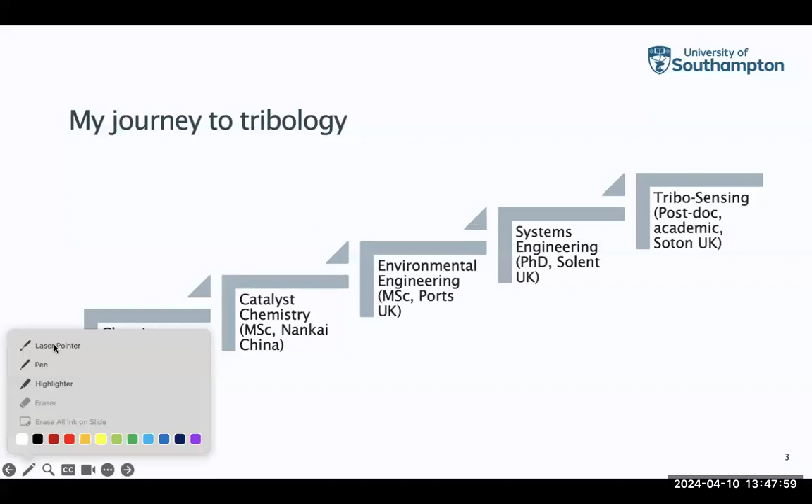I am at Southampton at nCATS. I'm currently a professor in Tribo-Sensing. Don't worry about the title for now, I'll explain it in a minute. I've been working there for more than 20 years. I joined Southampton in 2001, so it's been over 20 years I've been doing tribology.

But if you look back at what I did in my degree, master's, and PhD, it was nothing related to tribology. In a million years I never thought I'd be a tribologist, to be honest. But that doesn't mean I'm not enjoying what I'm doing - I really, really enjoy it.

To give some background, I did a bachelor degree in chemistry in China at one of the top universities, Nankai University. Following that, I did a master's degree, also 3 years, in catalyst chemistry.

After finishing my master's degree, I worked at an Environmental Bureau research institute, where I came across research in environmental engineering. I thought I'd like to do more study in environmental engineering, which is why I came to the UK in 1996 to study it for 1 year.

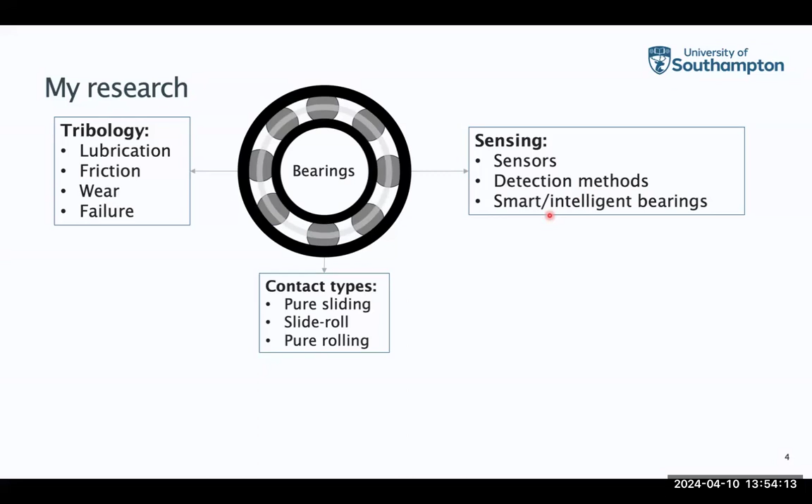That's an overview of my research areas. I've done other things as well, but these are the main things I've been doing over the last 20 years. Most of my projects are actually funded by or related to industry.

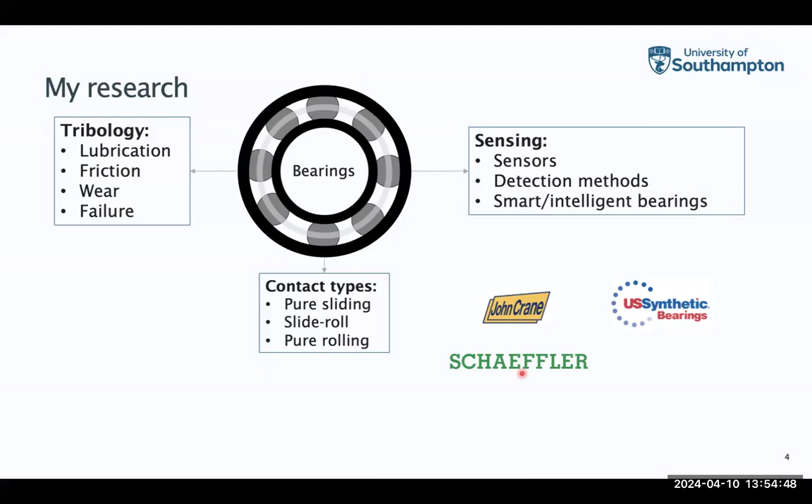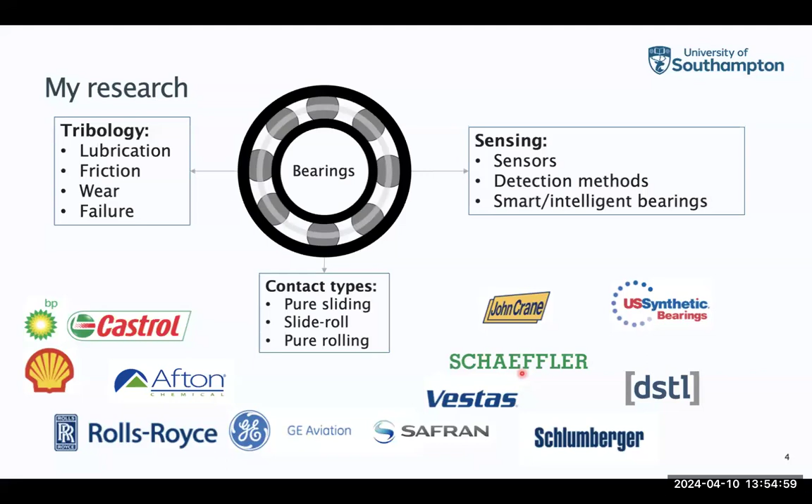For example, bearing manufacturer John Crane funded one PhD project looking at tilting pad bearings modeling for texturing surfaces, and also different materials for the US synthetic bearing company. Many of my projects are sponsored by Schaeffler in Germany, one of the largest bearing manufacturers in the world. My work has also been sponsored by lubricant manufacturers, additive manufacturers, OEMs, and sensor manufacturers.

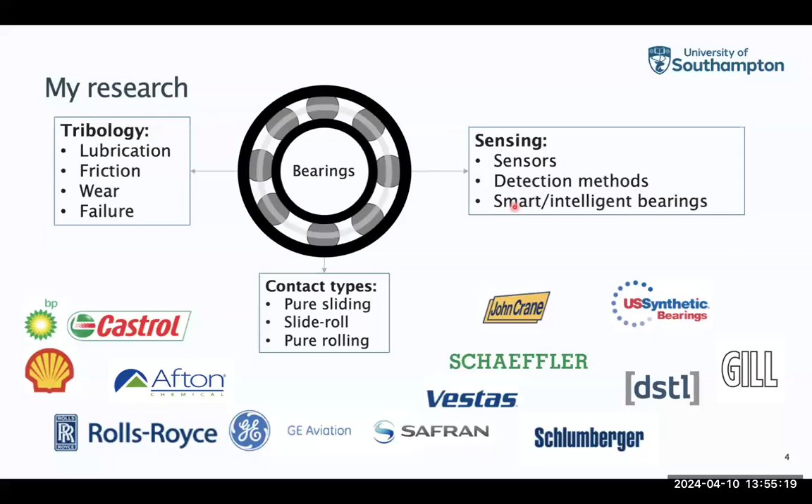So all the research is closely related to industry problems. Although I have done so many things for today, I wanted to share with you one of my main research areas related to microstructural alterations in bearing steels and rolling contact fatigue.

These topics have been studied at Southampton in my group for over 10 years now. We started from looking at just white-edging cracks, and then gradually moved out to all different types of microstructural alterations. As I said at the beginning, my career path, I didn't have any mechanical engineering background. So looking at those microstructure alterations was also a very big challenge for me, because I didn't have a materials microstructure background. Over the last 10 years we have developed loads of unique results, and I'm very proud of my students, my postdocs, and working with all the colleagues as well.

So I just wanted to share with you an overview of what we did in this area. Nothing like groundbreaking conclusions or anything, just to share what we did to tackle this particular problem in bearings.

So I just wanted to go back to start looking at rolling element bearings, obviously related to rolling contact fatigue. It is the phenomenon that's occurring in rolling sliding contact. This happens in wheel on roads or even on rail, and also in all the rotating machines where you have bearings, rolling element bearings, and also gears. So they are caused by cyclic loading on materials.

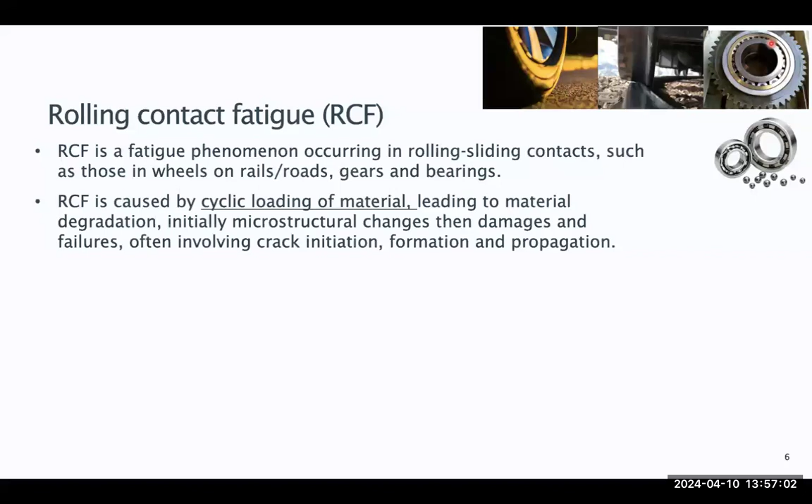This cyclic loading often leads to material degradation, which is the ultimate failure mode for rolling element bearings. This deterioration of material in rolling element bearings always starts with some sort of structural change, or we call it alterations. Then gradually it leads to damages and failures of bearings, often involving crack initiation, formation, and propagation as well.

Rolling contact fatigue can cause failures in rolling element bearings, but it is the ultimate failure mode for rolling element bearings. If the bearings are operated properly and lubricated properly, they can last a very long time. So the expected bearing life is over 20 years.

For example, for megawatts of wind turbine, the main shaft bearing normally rotates at around 20 RPM, and it is expected to serve more than 175,000 hours or 200 million cycles under continuous operation, or over 100 million cycles if they operate 12 hours a day. So this is what we expect, but as most people have heard, some megawatt wind turbine gearbox bearings fail at a very early stage of their operation, rather than serving for a very long time as expected.

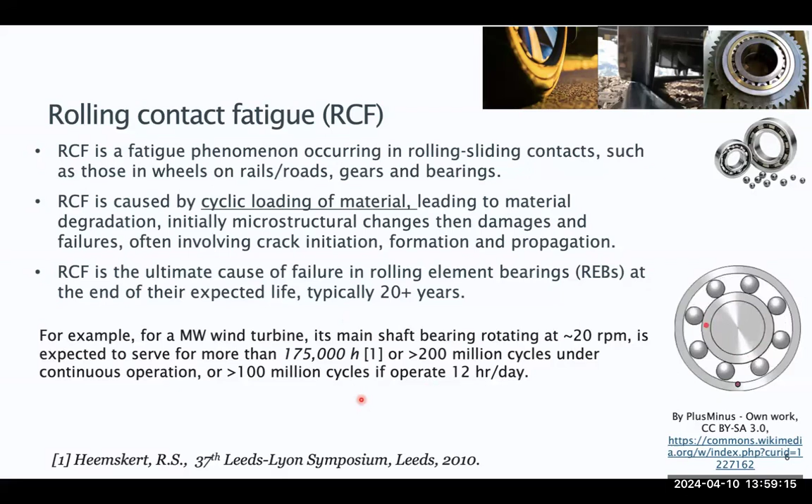So the bearing rolling contact fatigue life can be calculated based on the ISO standard 281, where they take into consideration the dynamic load rating, and also the operating load and the type of bearings. If you know your bearing design and you know the dynamic load rating, which you can normally get from the bearing catalog, you can calculate, under the particular operating load that bearing is used in a machine, their expected life.

So L10 is the number of cycles or hours at which 90% of the same bearings would survive without a failure. If you wanted to work out L50, that means that 50% of the same bearings will survive without a failure, which is much longer than the L10.

The dynamic load rating is calculated, tested based on the bearing having a stationary outer ring, and the inner ring can endure a load until failure at the rated life of 1 million cycles. So if the bearing can survive for over 1 million cycles under this load... until this load it cannot survive, then that will be the rating life of this bearing. That's the C for each type of bearing.

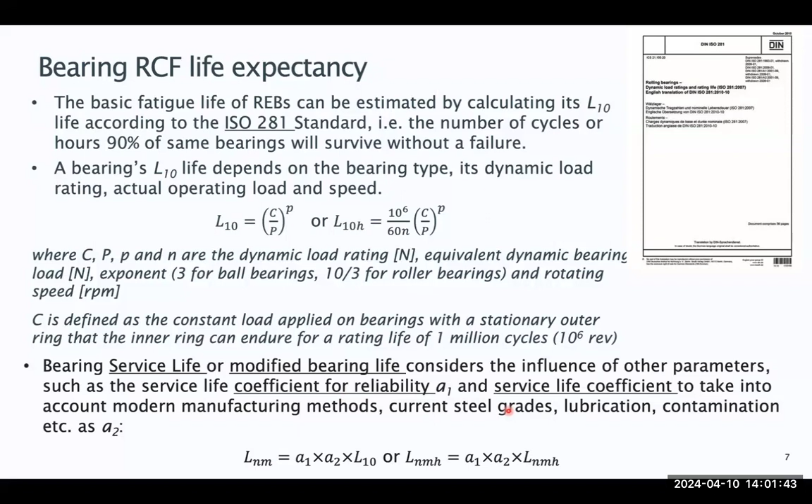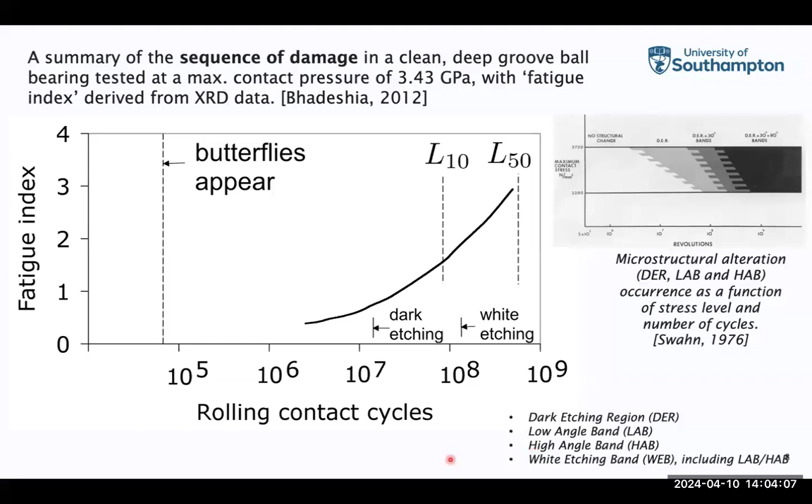DER is used to represent the dark etching region. LAB is low angle bands, and HAB is high angle bands. But normally we call it white etching bands to cover both the low angle and high angle bands. I'll show you some pictures in a minute so you know what I mean by different features. So this is what's done in the literature.

Just to recap, a butterfly normally looks like this. You have a center here, which is normally a non-metallic inclusion or void or some sort of stress raiser, and you can see two wings grow from the inclusion, so we call it a butterfly.

The dark etching region normally forms in the subsurface of the material - this is the top surface of the bearing race, and this band looks much darker than the bearing steel itself, so we call them dark etching regions. It's a reaction of the cyclic loading and material deterioration forming these dark etching bands.

And also the white edging bands, including both the low angle band, which is 30 degrees towards the surface, and the high angle band, which is 80 degrees towards the surface.

What we have found in the recent study is that the dark etching region can form as early as 5 million cycles, and the white etching bands, including the low angle band, occur just after 100 million cycles, and high angle bands occur just after 500 million cycles. These are all from the recent study we carried out.

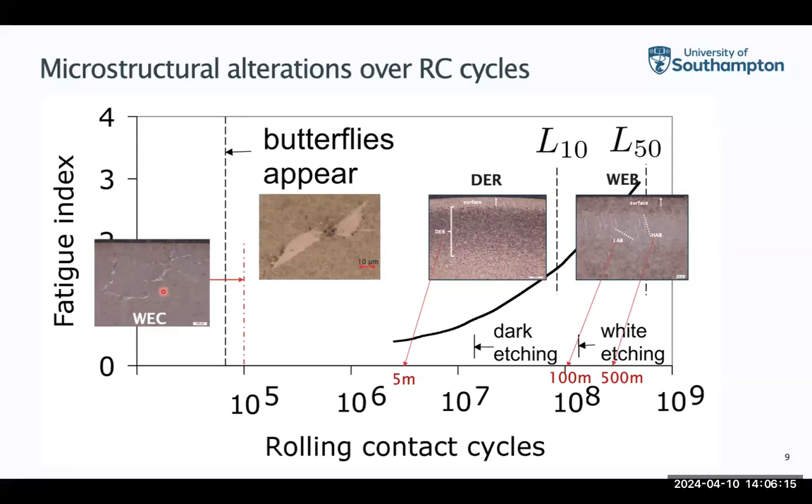Also, in recent studies we found that white etching cracks, which normally lead to early failure, happen a lot in wind turbine gearbox bearings - they occur much earlier in the bearing life, as early as 20% of their expected L10 life. These have very different features than the high angle band, low angle bands, dark edging region, or butterflies. So they are networked white edging cracks.

Most recently, we found another type of white edging crack, we call it oriented white etching cracks. They have white etching areas bordering the cracks, but they are more at defined angles to the surface, normally 45 degrees to the surface. They also lead to early failures of bearings.

So we have found all these different types of features, and they all have their own impact on the bearing rolling contact fatigue life. Some lead to early failures, like the white edging cracks and oriented white edging cracks. Some don't, like the butterfly, dark edging region, and white edging bands. Apart from the dark edging region, which is also a microstructure alteration but doesn't have it, the others all have what we call white etching areas.

If you look at them, they all have this white sort of structure in these features. These features appear white because they have what we call nanocrystalline ferrite grains - they are very small grains and harder than the surrounding matrix or steel structure. So when you polish and etch them, they remain as very strong material, they are not etched away, and that's why they appear white under optical light.

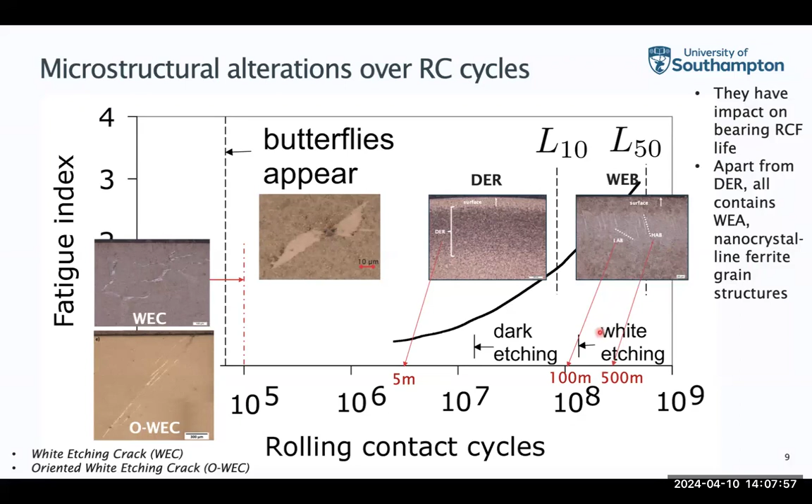So I'm going to focus on these structures for the rest of the talk. If you compare the appearance of these structures, I deliberately put them from left to right as stress cycles, so the appearance in the life of the bearing.

I have to clarify that the sequence of occurrence between butterfly, oriented white-etching cracks, and white-etching cracks is not 100% clear. It's not that butterflies definitely appear earlier than oriented white-edging cracks and white-edging cracks, but they're probably similar - they all appear at a very early stage of bearing life, but they are all earlier than dark edging region and white-edging bands, while the low angle bands occur earlier than the high angle bands.

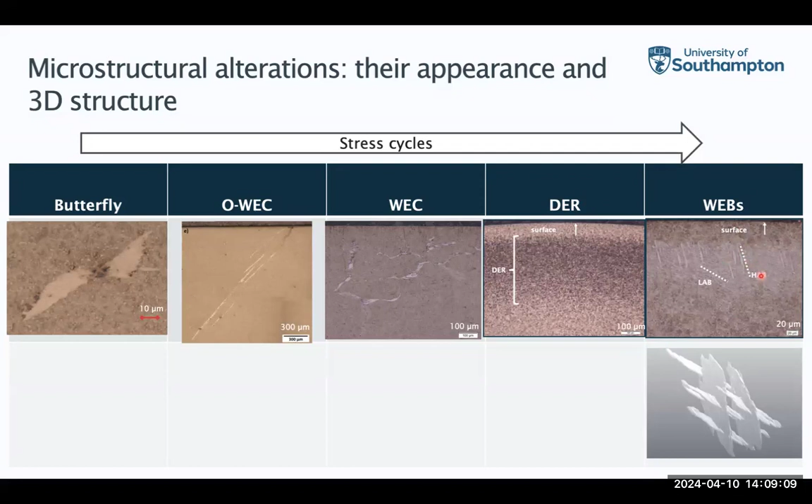So in 2D, they all look very differently, as you can see, but in 3D it's more interesting. Even with the white etching bands, although people have seen bands in the subsurface, this is a circumferential cut. In the circumferential cuts, you see those angled bands to the surface, but in the axial direction, there appears to be parallel bands.

So here we're showing a 3D view of the white etching bands. These are the low angle bands at 30 degrees, and these are the high angle bands at 80 degrees. So they are not just strips, they are actual plates going into the thickness of the ring. It looks like networked bands in the material. This is the first time ever that people have shown the 3D structure of the white-etching bands.

For the dark edging region, people probably understand more that they have a sickle shape in the axial direction - thicker in the middle of the contact region, thinner towards the edge of the surface. But if you look in the circumferential direction, they just look like a band. It depends on where on the thickness of the ring you're looking at - the thickness of the band appearing is different. For example, at the contact center it's thicker, but at the edge the thickness of the band becomes thinner.

The white etching crack in 3D looks like networked cracks with the white edging area bordered around it. In the axial direction, again, it looks very similar to the white edging band - they look like parallel bands. But if you look in the circumferential direction, they are like branched cracks.

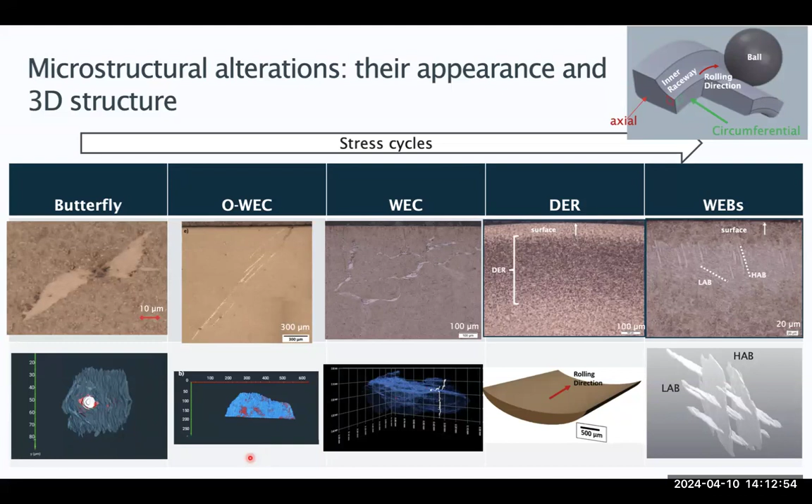Also, in terms of the microstructural constituents in those different features, we found there are 2 main constituents, which we call equiaxed and elongated grains. They are all nanograins. As you can see from the EBSD KAM map, they are rounded sort of grains. This is an SEM BSE image - you can see these are the equiaxed grains, and these are elongated grains, so they are longer, not just globular grains.

This is for the white-edging crack - for one of the white-edging cracks, you can see the 2 different types of nanograins here. And these are for one of the LABS, the low-angle band structures - you can see they also have the elongated grains and the equal-axed grains. So in both structures, you can see the 2 different types of grains in their microstructure.

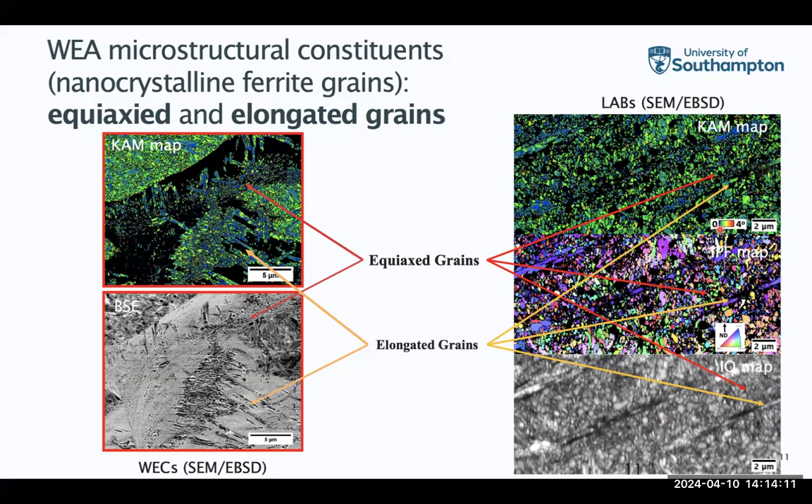For the butterflies and the orientated white-etching cracks, we found that they only have equiaxed grains at different sizes, but we rarely see elongated grains in them. So they are slightly different from the white-edging cracks and the white-edging bands.

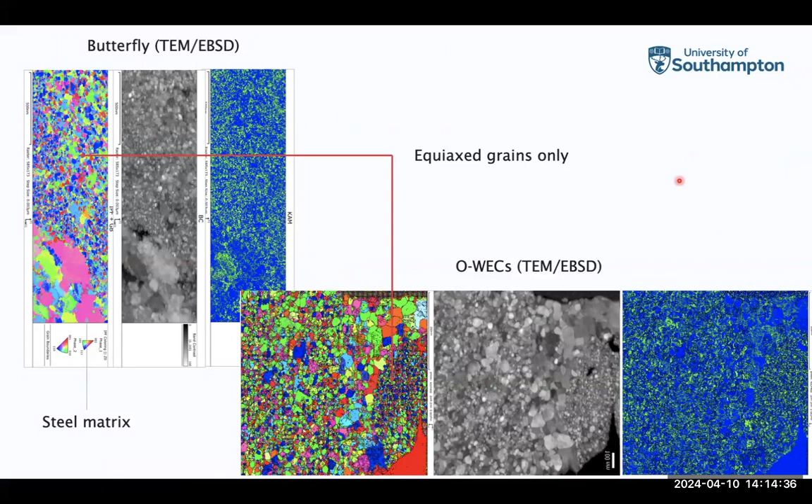With the equal-axed grains, we also separate them into different sizes - we call them fine grains. They typically appear very white with very fine structures. We define these as below 50 nanometers in diameter. We also have slightly darker appearance grains, which we call moderate, between 50 and 100 nanometers, and coarse grains between 100 and 300 nanometers in size.

So to summarize, for the 4 features - butterfly, oriented white-etching cracks, and white-etching bands - we found that butterfly, oriented white-etching cracks and white-etching cracks all have fine grains, which appear very white, and also most of them have moderate grains, which can be white or slightly darker depending on what's on the surface. The white-etching cracks also have some coarse grains, which are less common. Most are fine and moderate grains, but coarse grains are in very small amounts. All three have elongated grains, but not as many compared with the white-etching bands.

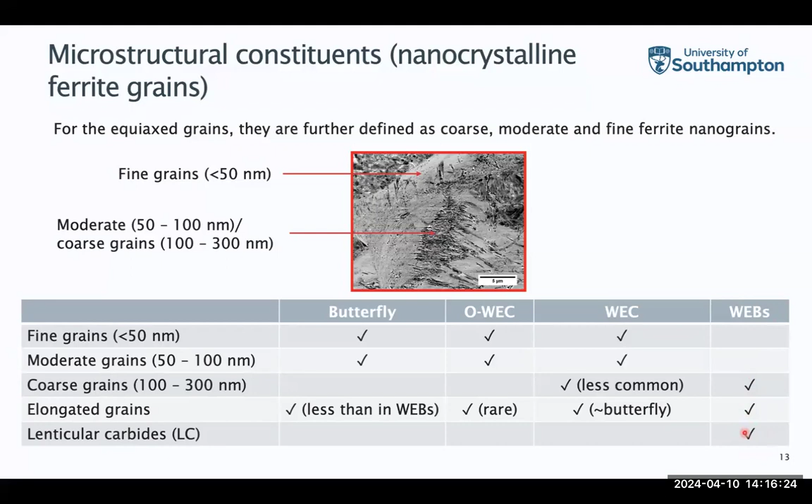For the white-etching bands, most grains are coarse grains and elongated grains. They also have what we call lenticular carbides. As you can see in this micro SEM image, we have the elongated grain here, the equal-axed grains there, and also this very fine structure here, which we call lenticular carbides.

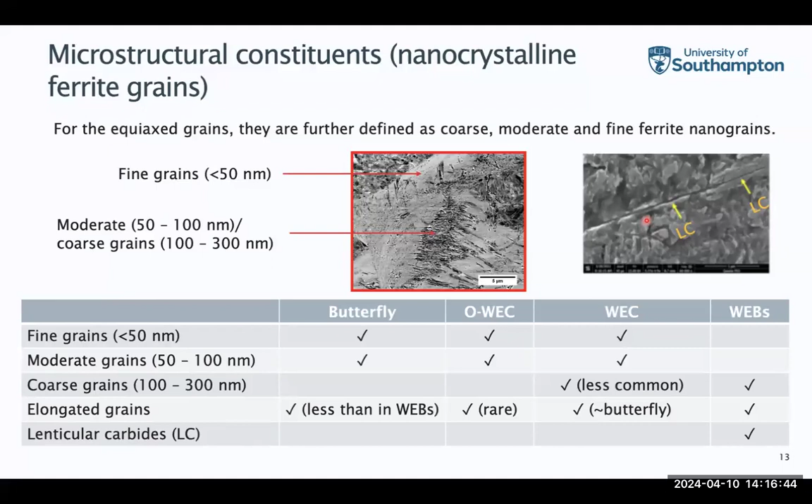All the mechanisms of these features' formation have been discussed in our publications, so I'm not going to bore you with that in this talk, but just show you the fun things.

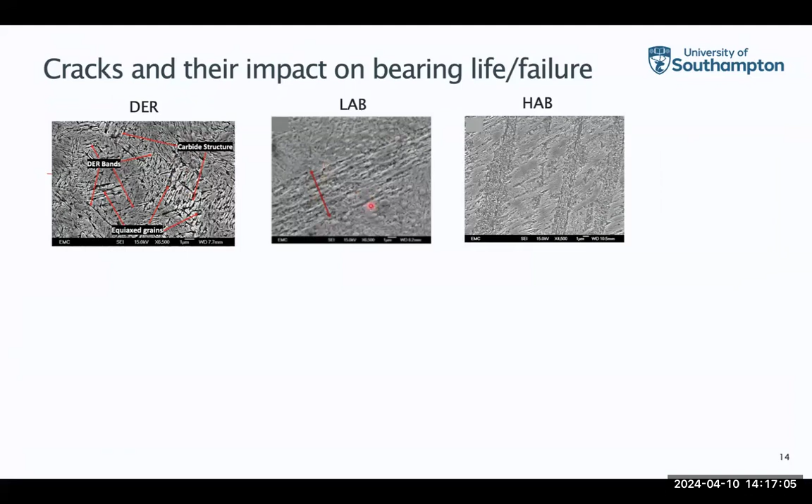We also looked at the influence of cracks in these features and their impact on bearing life. We found that features like the dark etching region, which have small bands, and also the low angle bands and high angle bands, don't have cracks. We did detailed analysis and found they don't have cracks and don't lead to early surface damage either.

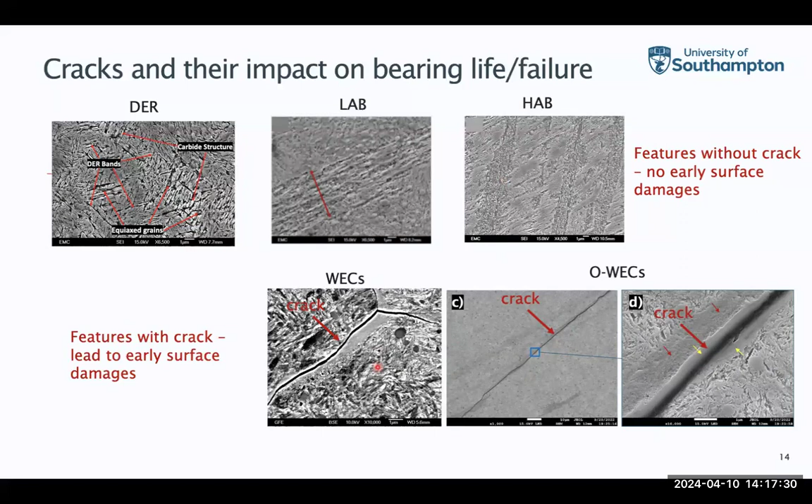With the white-etching cracks and oriented white-etching cracks, we found they both have very obvious cracks in the structure, and both lead to early surface damage and even early bearing failures.

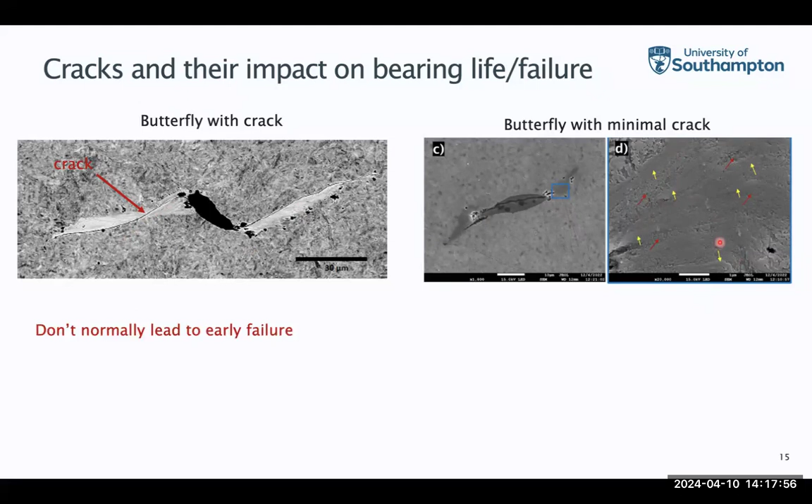With butterflies, it was a bit strange because some of them have cracks in the wing - you can see here a very obvious crack in the wing - but some don't have cracks, like this wing, where we don't see any major cracks. Butterflies don't normally lead to early failures either. We tried to find out why.

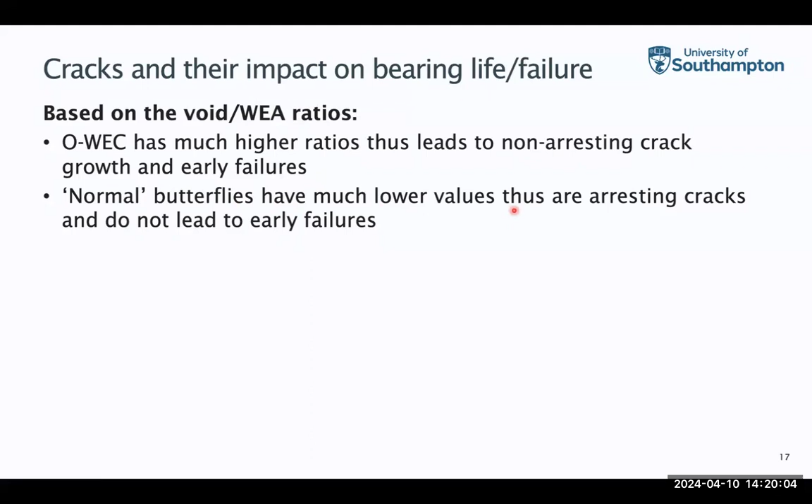This gives us suggestions why some features lead to early damage and failures and some don't. Based on these analyses, we conclude that oriented white-etching cracks have much higher void-to-whitening-area volume ratios. That's why they lead to non-arresting crack formation and growth, and then early failures. With normal butterflies - not considering very large ones which we know lead to early failures - they have much lower ratio values, which is why they arrest and don't lead to failures.

We expect that white-etching cracks would show similar values or a similar phenomenon to the oriented white-etching cracks, but unfortunately we haven't done this kind of analysis yet. It's quite time consuming and very difficult to get all the details, so this is ongoing. We're expecting some conclusions on white-etching cracks, which is a topic of interest to many people.

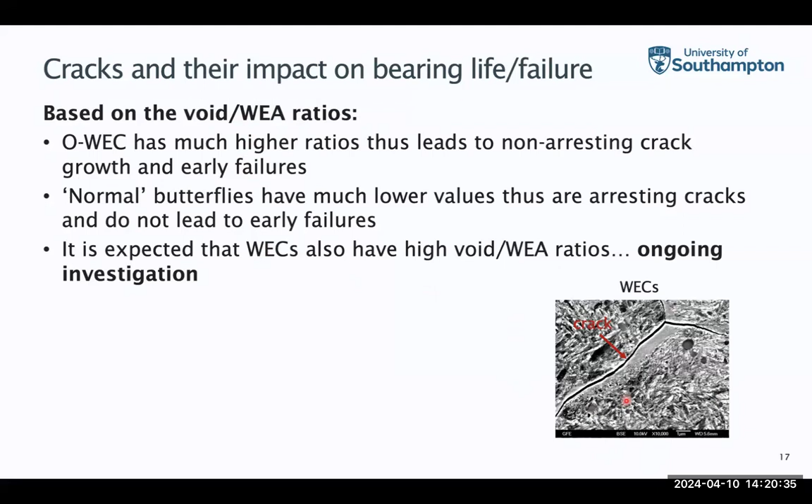Professor Wang - oh sorry, you were just saying, that's okay. Go ahead. Sorry, I can't see the time, so I've gone over a little bit.

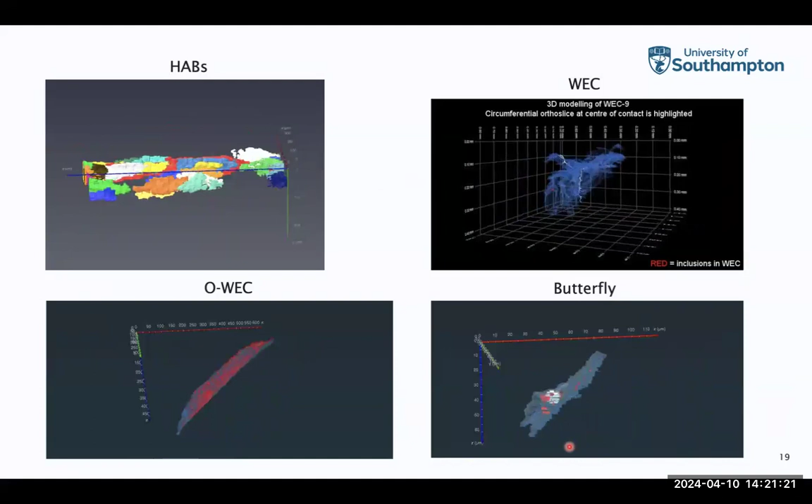So I'll just leave you with these 3D videos showing the high angle bands, the white-etching cracks, and a butterfly here, and also the O-white-etching cracks, so you can see how they look in three dimensions. Thank you very much.